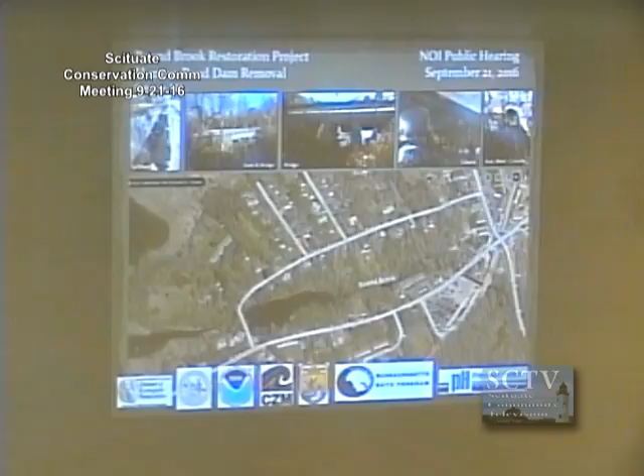So those two components factor in heavily with the rest of this design. Looking into the spillway or the dam itself, it's actually accreted a lot of sediment into it, and that has become vegetated, primarily during the growing season.

Did that work, Cal? That point—oh, shoot, it was battery dead. Okay, bummer. Yeah, do you want me to point if there's something that's not working?

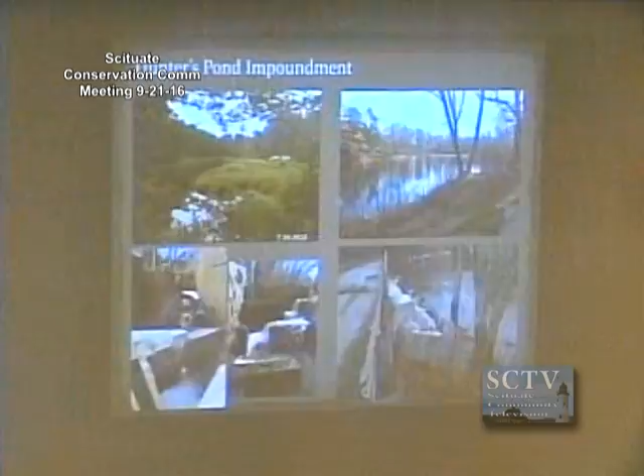So just to orient yourself, flow goes in this direction. This is the spillway, that's the mill building, this is where the culvert is. And likewise, spillway here, culvert here.

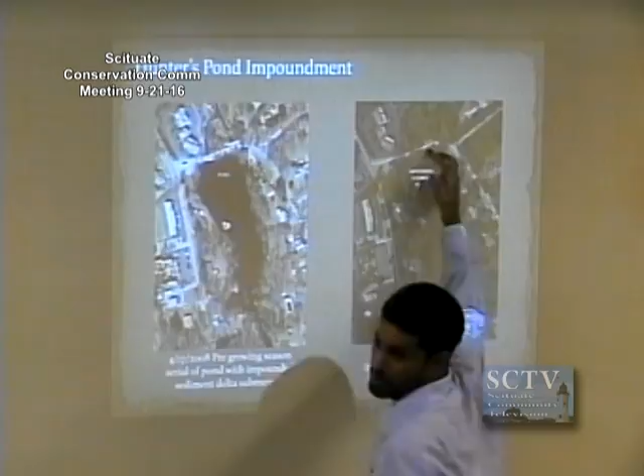We did more sediment sampling to develop a more detailed sediment sampling plan, more historic resources documentation, more detailed engineering design associated with bridge scour, fish passage conditions, the culvert repair work, and there's a water line also that crosses the impoundment.

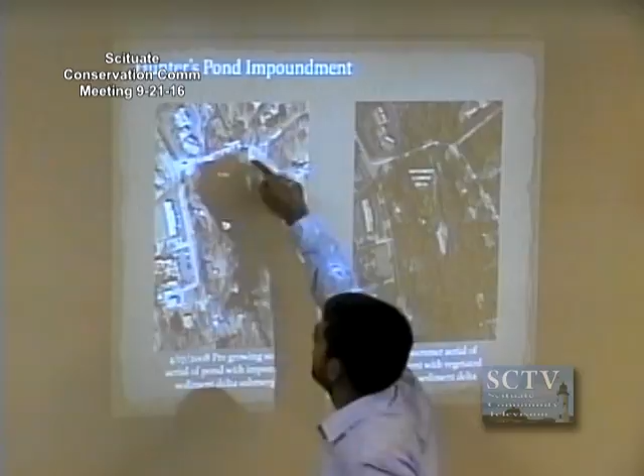Let me point out where that is. It's not visible, it's underwater - it's an old water line that crosses right through here. It's old enough that the town is interested in repairing it. In fact, they were considering repairing it before this project got to this point, but now we're going to do it all in one fell swoop.

It can't be eliminated entirely - it has to be replaced, and its depth is unknown, and it could become a conflict if after removal it becomes exposed. So there's multiple reasons to remove it: it's old and needs to be replaced, but it's also potentially in a position that could interfere with the channel. So we're proposing to install it at a much safer depth.

So for water line relocation, we're now in the NOI process of the regulatory system, and Army Corps and dam safety permits are yet to come. Those are our next steps in this process.

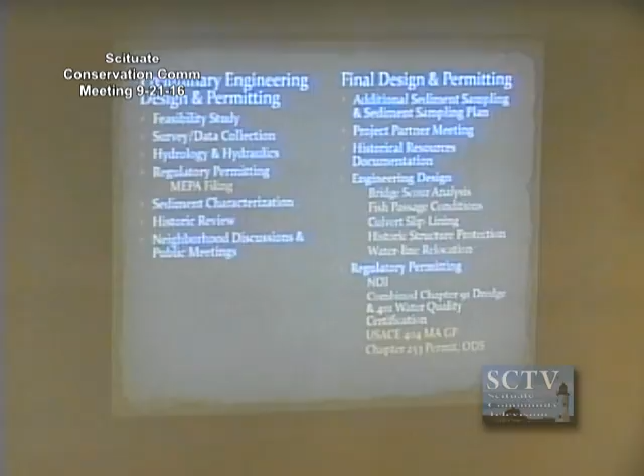Getting back to some of the design elements, we've discussed with the Natural Heritage Program - there's a native plant upstream that's of interest to them. We've been communicating with them during the pre-NOI process to inform them in more detail about the hydraulic impacts. They've since ruled that there will be no adverse impacts anticipated to this native plant.

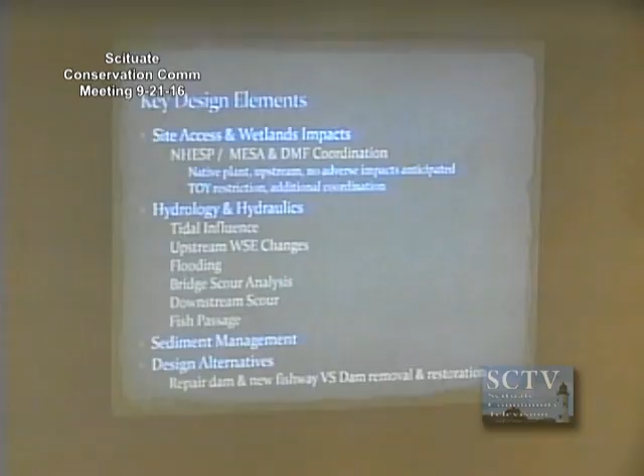We're also coordinating with the Division of Marine Fisheries about a time of year restriction during construction and some additional coordination after that. Both of those agencies we've been in regular communication with, and DER is in ongoing discussions with DMF. Next I'm going to hit on a few of these in more detail - the hydrology and hydraulics items, sediment management, and some of the design alternatives we looked at.

Natural Heritage said there was no endangered species or anything of concern, right? Right, so they mapped - their habitat exists upstream of the railroad bridge.

They wanted to know more information about how we were going to be influencing water surface elevations because it's a wetland plant. Once we established through hydraulic modeling that there's really not going to be too much of a change up there, they were comfortable with this and basically ruled that there would be no adverse impact anticipated.

If I could add - Natural Heritage was clear up front that they wanted to see some really solid analysis on that, and as part of the NOI package, we provided that to them, which they provided a letter, included in the package to you. So they ruled that there was no additional MESA review required on that as well.

Some of the basics of the engineering design, presented in the NOI package, is that we're talking about removing most of the spillway - not all of it, the full vertical extent - but to allow for the fish ladders to remain in place. The fish ladders are actually concrete, and one fish ladder is tied into a retaining wall that's right up against Mordecai Lincoln Road.

We want to leave that in place to not disturb the Mordecai Lincoln Road embankment, and likewise on the other side that also has some stability associated with the embankment. So we're proposing to cut that spillway right in the middle to allow for a natural channel to go right through the bridge, but to not remove the fishways on the side.

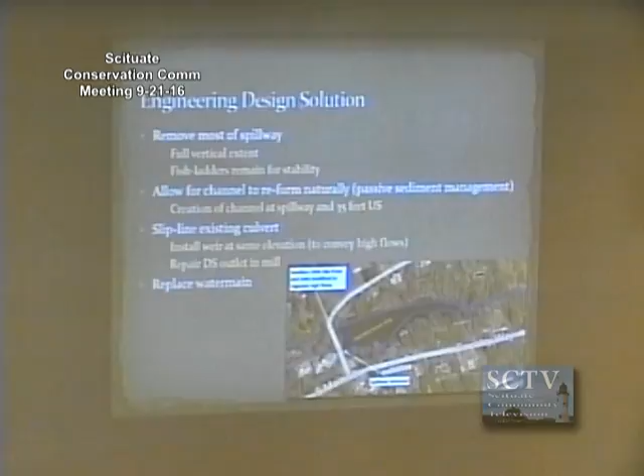Looking at the impacts to regulated areas, we're essentially talking about converting a pond into a channel and its adjacent floodplain. This would mean a net loss in land under water, a net gain in bordering vegetated wetland, and essentially no change in the 100-year floodplain. The same area that gets inundated now under existing conditions will be inundated under proposed conditions. And then there are nominal changes to inland bank.

Basically, inland bank right now is mapped around the perimeter of the pond. This will be a shorter length of a single channel going through the impoundment, so it involves a lateral shift, but not much of a shift in length. And riverfront area will now apply, whereas it technically does not apply right now because this is a pond.

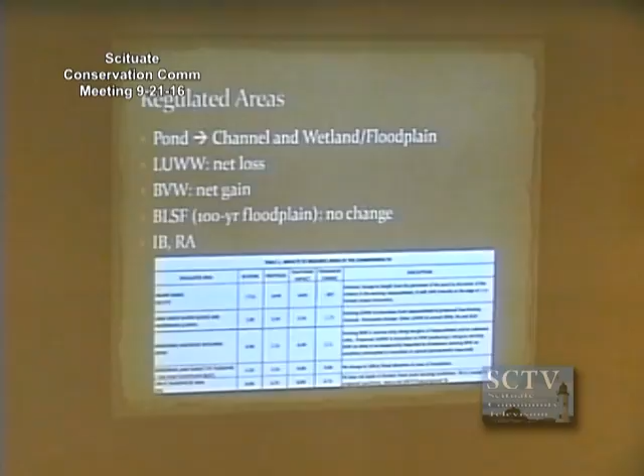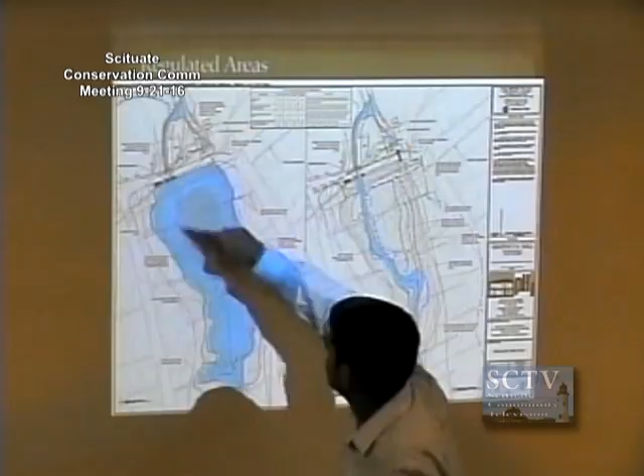So there'll now be a riverfront area along this channel. Looking at one of our plan set sheets, this is the regulated areas plan. On the left-hand side is the impoundment. There's the delta that's been mapped as bordering vegetated wetland, I'll point that out now. Essentially, this area is what is mapped as bordering vegetated wetland — this is the sediment delta that has vegetation on it.

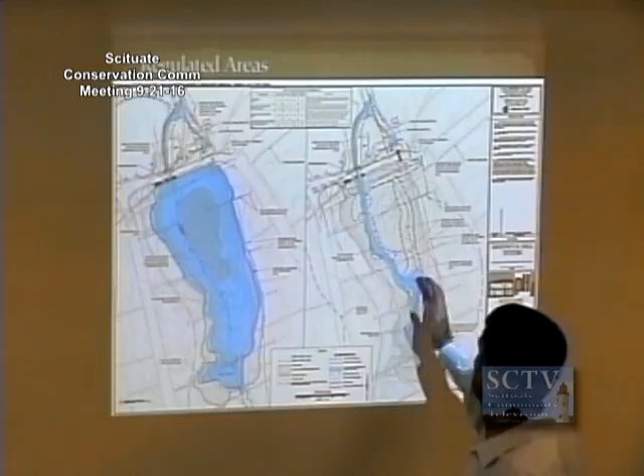Under proposed conditions, we'll see some sort of channel. Its actual pathway is a little uncertain at this point because the sediments are so soft — there are multiple ways you could cut through. We've proposed one potential alternative for that. All of this area will essentially revert to or convert to some other kind of bordering vegetated wetland.

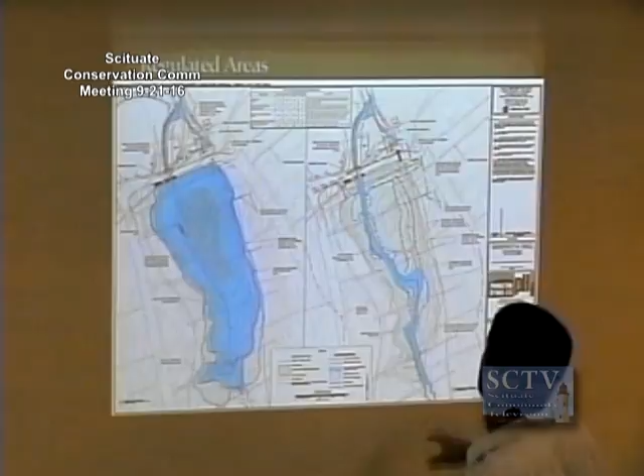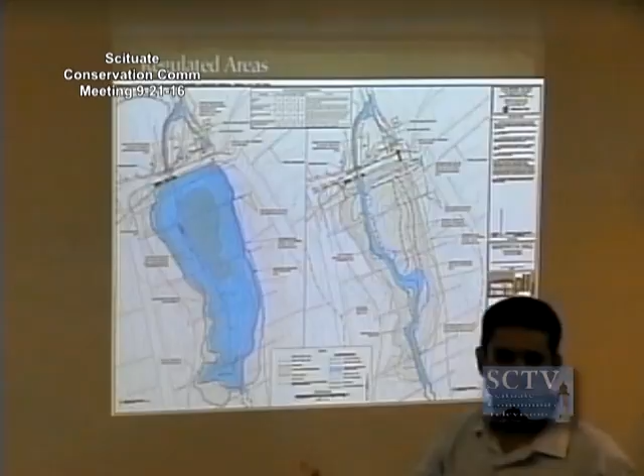And then the other interesting aspect about the tidal influence you were asking about is that this red line essentially corresponds to what will be inundated under the highest predicted tides. My next slide gets into that in more detail. Thank you.

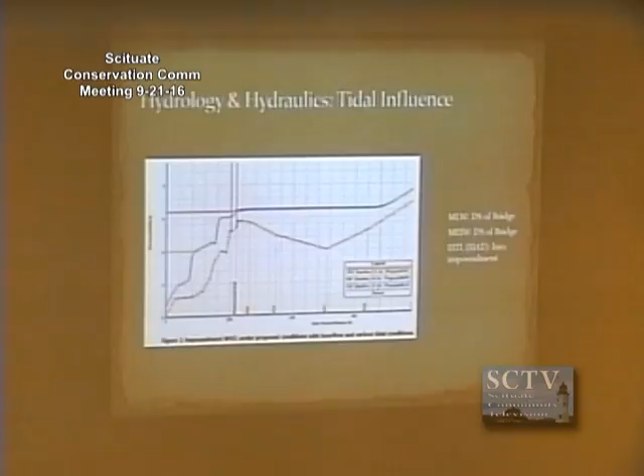This is what's called a longitudinal profile taken out of the hydraulic model. Flow is essentially going this way. This represents the impoundment, this is downstream of the impoundment, and this line represents Mordecai Lincoln Road. This is with no dam in place, comparing the tidal conditions from existing to proposed conditions.

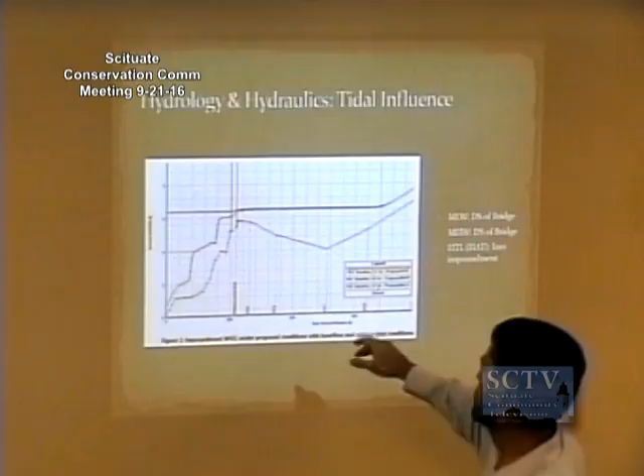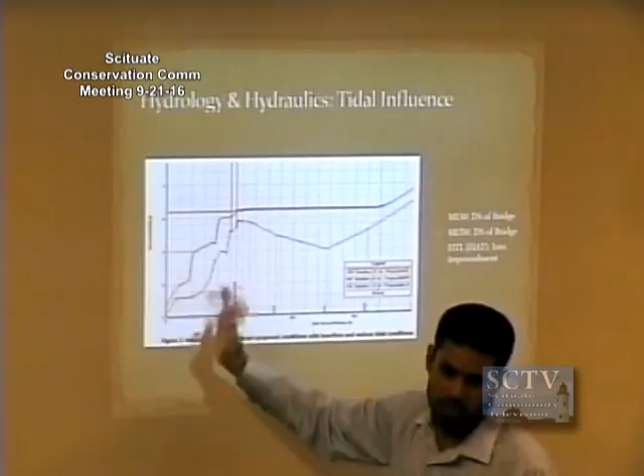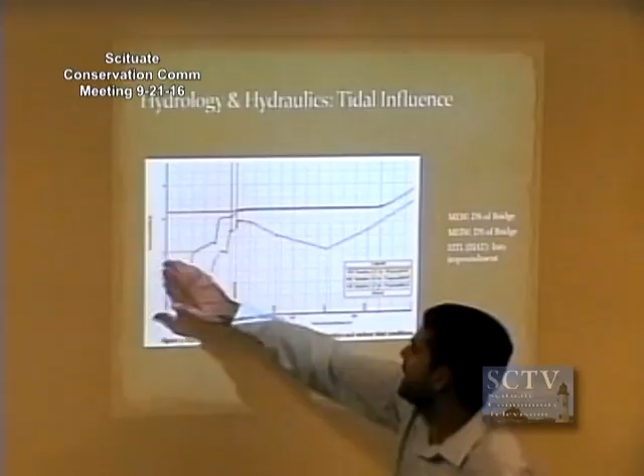This would be low tide, using a base flow — the minimum flow coming down the Bound Brook. This is what low tide looks like, way out, beyond the hydraulic model. This is called the mean high water, the middle high tide. As you know, every day there's a higher high and a lower high. This is the in-between, and that interface is the channel still downstream of Mordecai Lincoln Road.

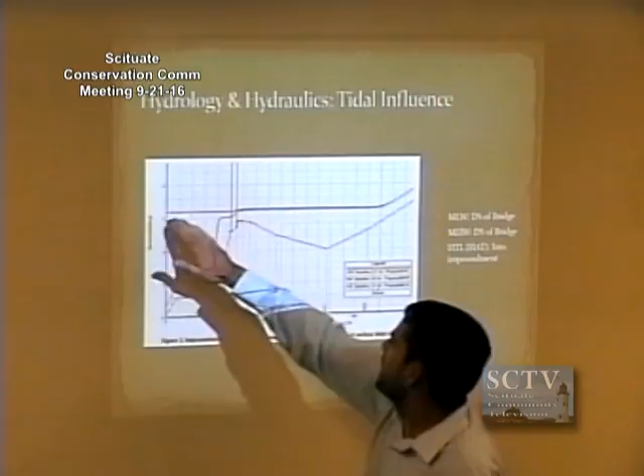However, the red line represents the highest astronomical tide — that's the spring tide, or highest predicted tide, and that will now have access into the impoundment, whereas before it only hit the dam.

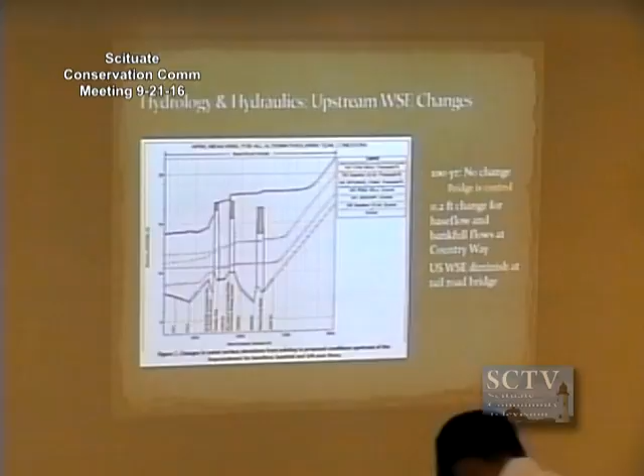So looking again at upstream water surface elevation changes, this became of interest to the Natural Heritage Program. This is Country Way, this is the railroad bridge, and this is Henry Turner Bailey Bridge.

The key point to note here is that we're comparing existing and proposed flood elevations under the 100-year flood. There's almost no change from existing to proposed conditions. We're actually utilizing the culvert under the mill building to convey some of that flow. If we were to block that culvert off, that would make the 100-year flood higher than it is now.

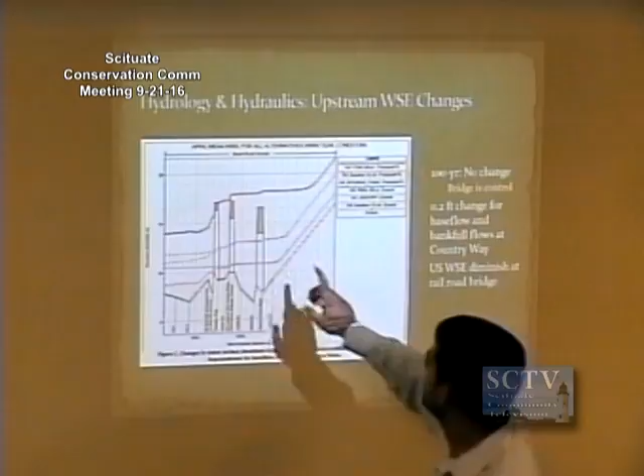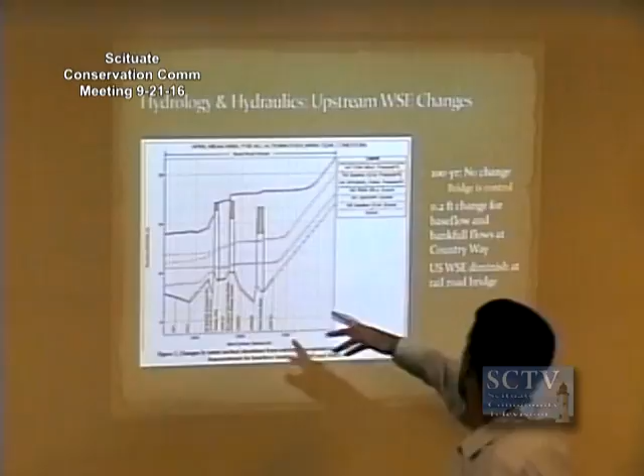So we actually need that culvert there. Under lower flows, the base flow, the lowest flow, and the bankfull flow, which is somewhere between the 1 and 2 year recurrence interval flow, we're talking about water surface elevation changes on the order of 0.2 foot at the upstream end of the impoundment, around these bridges. So the area of that sensitive species would have very little change in water surface elevation.

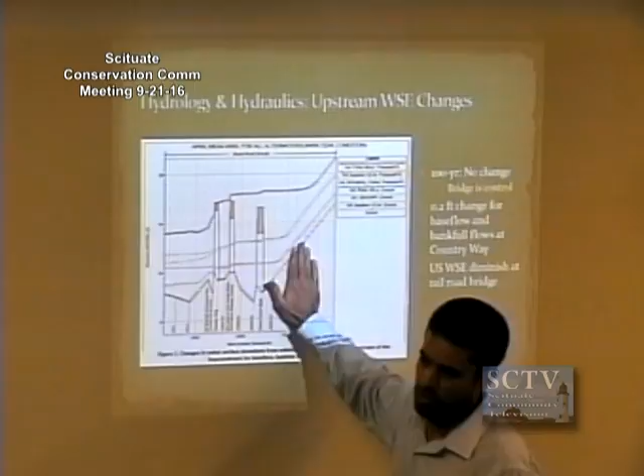So again, looking at this, I've already talked about it, but this is showing the 100-year water surface elevation during the 100-year flood at the dam. This is the dam, this is the bridge.

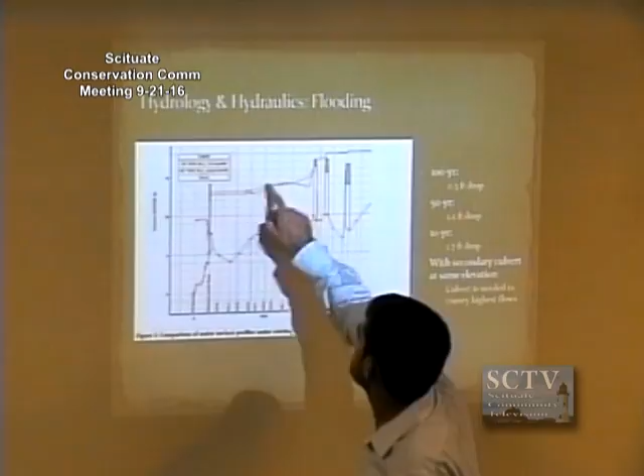Blue is existing conditions, red is proposed conditions. It's a slight drop of about 0.3 foot. This is very small, probably not going to be noticeable just by observation.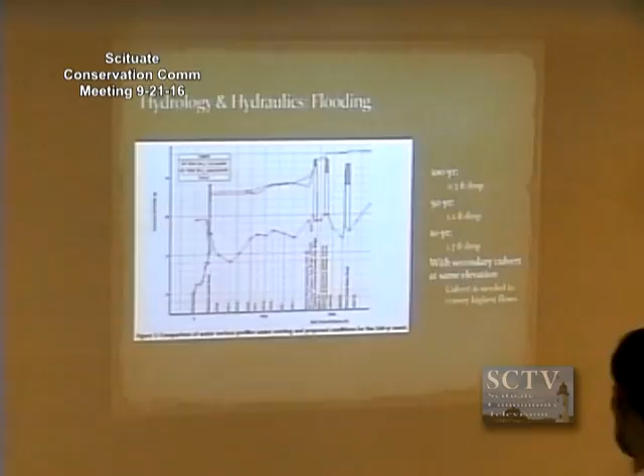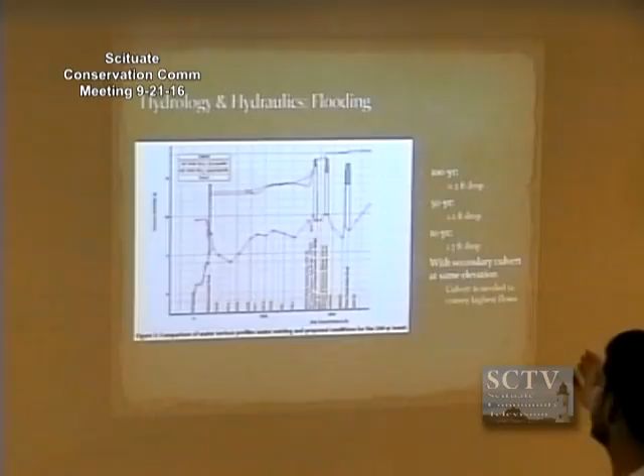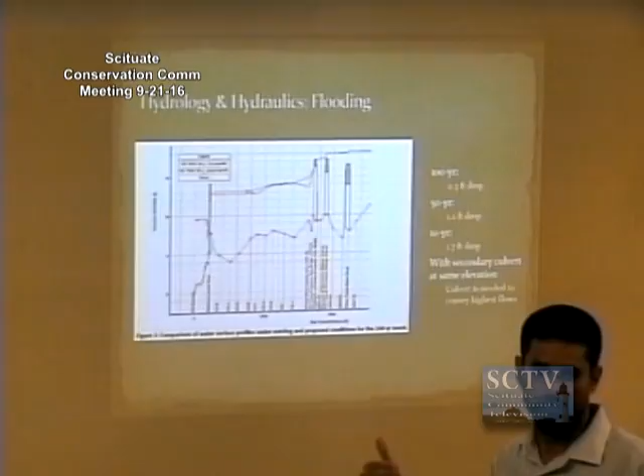But we predict a larger drop under the 50-year event of just over a foot, and then just over 1.5 feet under the 10-year flood. So again, for the 100-year event, it was actually essential to allow flow to go through that culvert in order to keep those flows at or below existing conditions. If we were to block that off, it would increase the risk of overtopping during flood events.

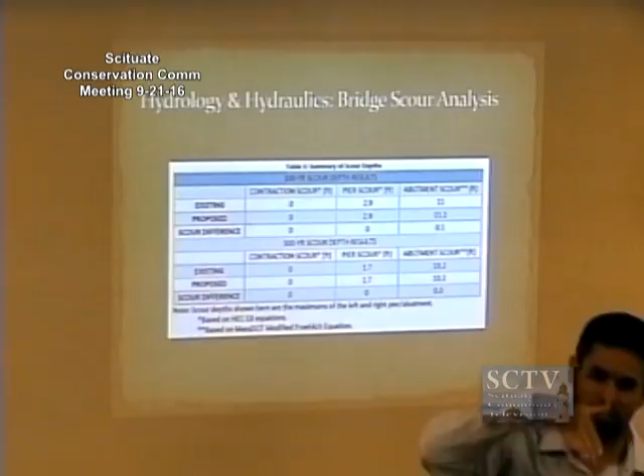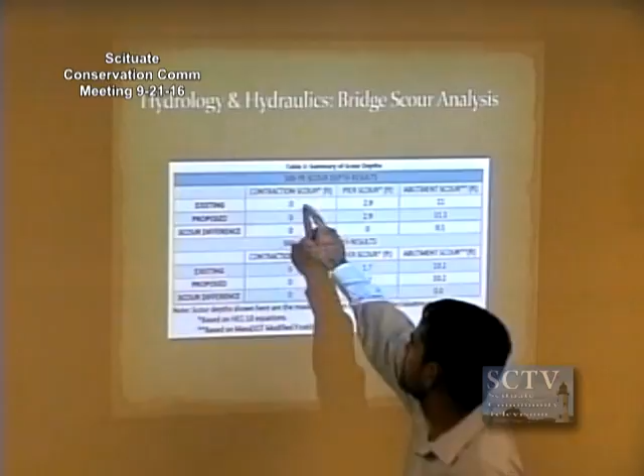We also looked at scour at the bridge. The key points to notice here: we did a typical scour analysis following MassDOT regulations, looking at 3 types of scour. Contraction scour is created by flow that goes through a constriction and is accelerated — constricted on the sides, but even under flood events it's also constricted vertically, which is called orifice flow, under higher velocity. The point being that under existing and proposed conditions, there's no real change anticipated in scour.

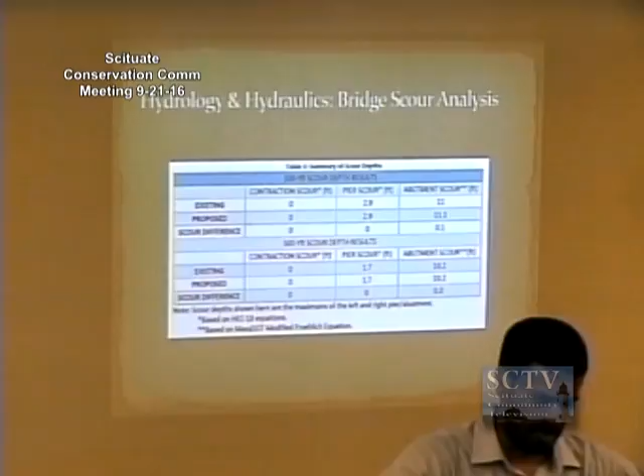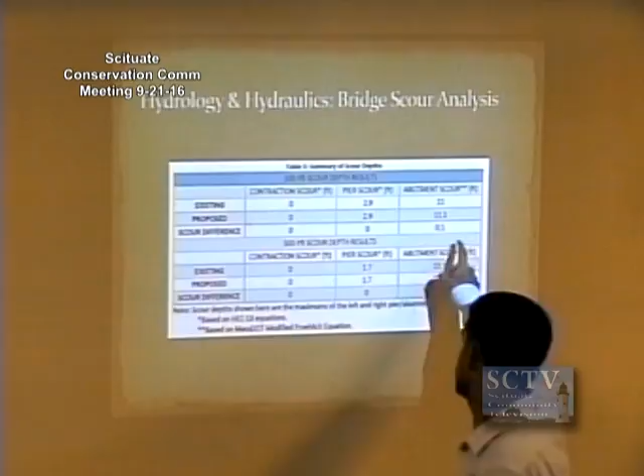We also looked at pier and abutment scour. There are 2 piers in the small bridge, and abutments on either side, so we looked at the vortices that form right around those structures. Again, there's no substantial change anticipated for any of those — a minor difference in abutment scour between existing and proposed. Basically, we're not expecting any changes in scour of the bridge structure.

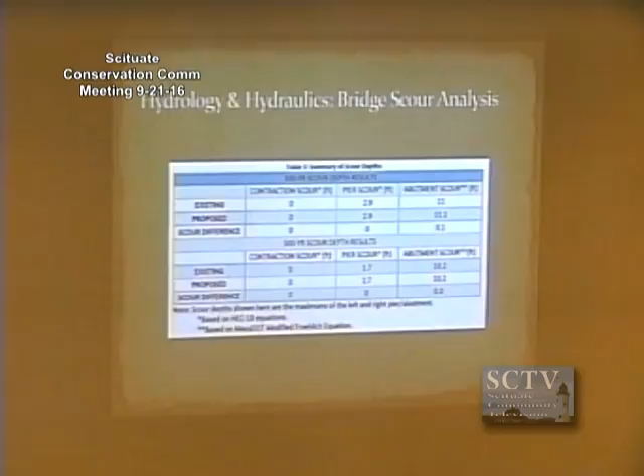Is a vortice like an eddy type of thing? Well, an eddy is kind of a slow velocity zone — this is actually something faster. If you stood in flowing water, you'd feel that flow rip around you, that's the vortice that forms right there. I guess technically it is connected to the eddy behind your legs if the flow is right there, so that scour happens where you're interrupting flow or creating an obstruction.

Okay, this gets to the sediment investigation. Ultimately, after the 2 phases, we took 8 sediment samples throughout — 2 in the upstream areas, 3 in the body of the impoundment, and 3 downstream.

We also probed the impoundment and had it surveyed. We figured the total volume was about 3,000 cubic yards, but with the formation of a single channel and the low gradients here, we really only expect about 450 cubic yards to be mobile after the dam is removed.

We also ran the typical gamut of contaminants that you test for — EPHs, PAHs, PCBs, metals, VOCs — so volatiles, petroleum hydrocarbons, polycyclic aromatic hydrocarbons, PCBs.

We then compare them to human health standards, MCP soil and groundwater standards, as well as the freshwater and marine sediment probable effect concentration. Above that, you would likely have some sort of impact on ecological standards. Below that, you wouldn't.

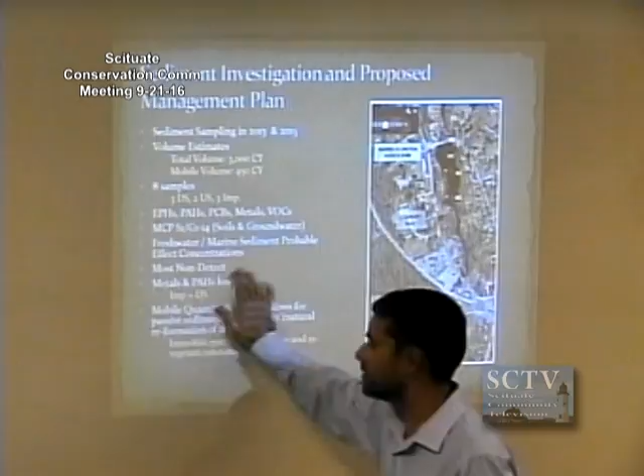Most of these were non-detect, not detected. Metals and PAHs popped up in some of these samples and some of the downstream samples, but they were basically in the same ballpark. So we don't perceive that being a problem, relative from impoundment to downstream, if that's essentially the background condition in this watershed.

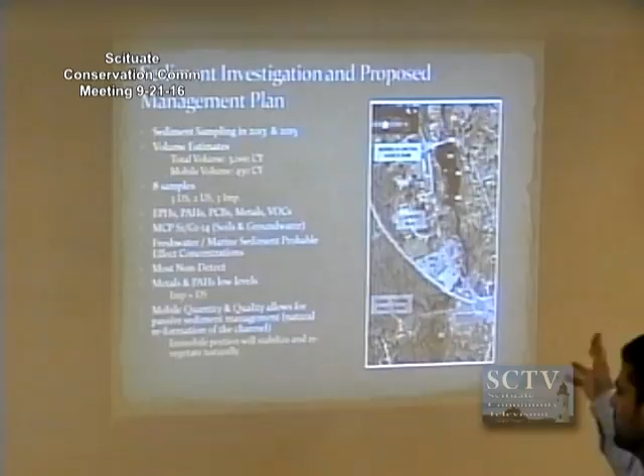That provided us justification to recommend basically a natural reformation of the channel rather than excavation and hauling off site. That would not only be unnecessary based on these contaminant levels, it's an extremely costly and high impact activity. So it's something we were glad to not have to recommend at this point.

The vast majority of the sediments, especially the ones that are vegetated, are likely to just sit in place and dewater, and then the vegetation will transition to something a little bit drier, a little bit less wet, but it'll likely stay in still a BVW, bordering vegetated wetland category.

Is the revegetation just naturally occurring, or is there planting that's going to be going on after? That's a good question. Right now, we're proposing to allow it to occur naturally.

With a lot of our projects that we've done at DER and others, we see there's such a large native seed bank within those impounded sediments that we generally see those impoundments vegetate within 1 to 2 growing seasons. Paul has some photos later that show what a typical example might look like. I'll jump to that right now.

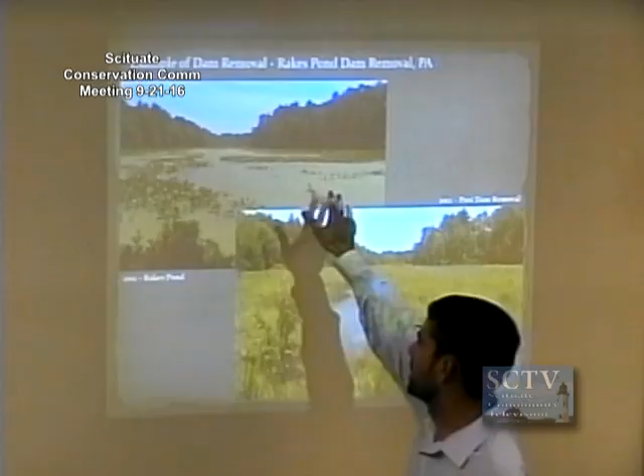This is a project we did in northeastern Pennsylvania. I pulled it out because it has this sort of similar condition. When the dam was intact, it had a lot of spatterdock and emergent vegetation, emergent floating vegetation, and a lot of duckweed. When we removed it, within one full growing season, that's essentially what it looked like.

Nature abhors a vacuum. It fills fast with a lot of annual plants initially, and then more long, perennial plants will eventually creep in. So it's actually a fast process. We've seen sites green up at the tail end of a growing season. When a dam was removed in October, it was actually green by Christmas.

And granted, that's a thin ground cover, but it happens pretty rapidly on its own. There's a native seed bank in the sediments as it is, so a lot of seeds are just sitting there waiting for the right conditions, and once they occur, they take advantage of it. That means a lot of seeds sitting there would, in other situations, never actually bloom because they're not in the right spot to germinate.

Do you ever see more invasives in something like that? Yeah, we do. We take that into account. It's something we did not think was a huge problem here because there's not a lot of invasives in the perimeter. But in areas where there's already a good established population, like say a phrag population, that's where we recommend sometimes going in and treating it before you do the removal. It just depends on the situation. If there's a lot established there already, we'd have reason to believe it's going to expand. In this case, it's not a huge problem at this location, so we're not recommending it at this time.

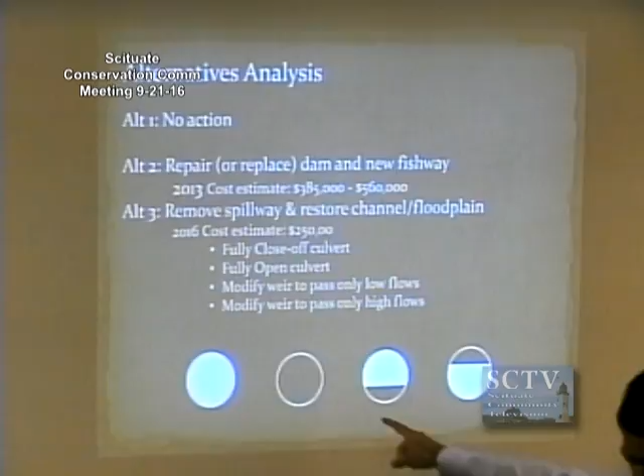Leaving that culvert fully open - maybe I didn't explain this well enough - it has a weir in front of it, so it's partially blocked. Capacity through that culvert is really dictated by the weir in front of it, not the actual size of the culvert itself. So we had proposed or looked into the alternative of removing that weir altogether and opening it up to all flow.

That was not desirable because it essentially would create a false attraction to fish moving upstream. As it is now, there are sort of two channels. One channel is coming out of the mill race and out of the mill building, and the other is coming out of the spillway.

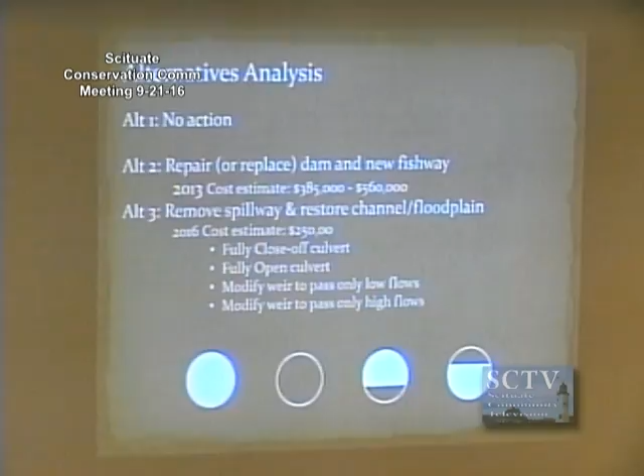They converge at that point. If there was still flow coming out of the mill race, fish would have to flip a coin and decide which one to take. And if they took the one into the mill building, they'd run into a head wall and not get anywhere, which would really impede the passage performance and interfere with one of the big goals here, which is to restore fish passage.

So that was one reason against these two options. And this option, leaving it totally open, actually increased flows, increased velocities, and set up the foundation of that building to be subject to more flows than it has now. We didn't want to do that because that's putting the historic structure at risk. So those two were excluded, and this is essentially a status quo situation.

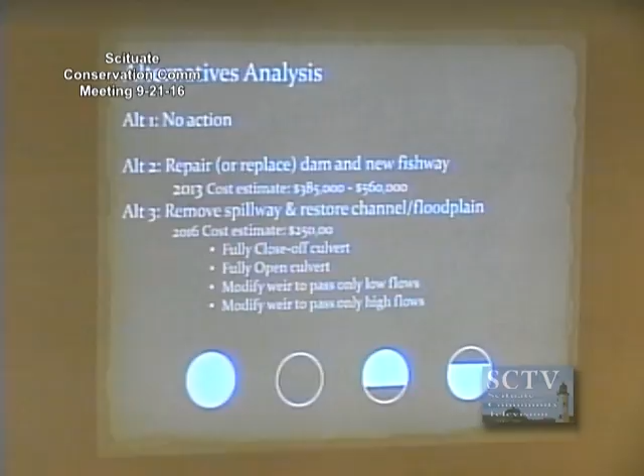It turned out that the elevation of that weir as it is now is just about right to keep the 100-year flood elevation at or below what it is now. So we're proposing to slip line the culvert and then reinstall a weir at the same elevation as it is now. That whole process and design is being coordinated with Mass Historical Commission as well - the slip lining process and then the repairs to the head walls and the wing walls.

Our plans do have some details that are pretty detailed in terms of the amount of work that can be done at the outlet of that pipe, because that outlet's right into basically the cellar or basement of that building. If you're looking at it, you can see many iterations of repair work done around it - the original dry laid masonry, then some more wet laid, brick work, concrete block, and then concrete pour and grouting.

So there's been a lot of generations of fixes on that, and we're basically trying to optimize this by repairing as much as we need, but not more than we need to, because we don't want to get into that original old mill building structure. So it's a bit of a balance between making something engineering and solid that'll last, and not going too far into the historic structure.

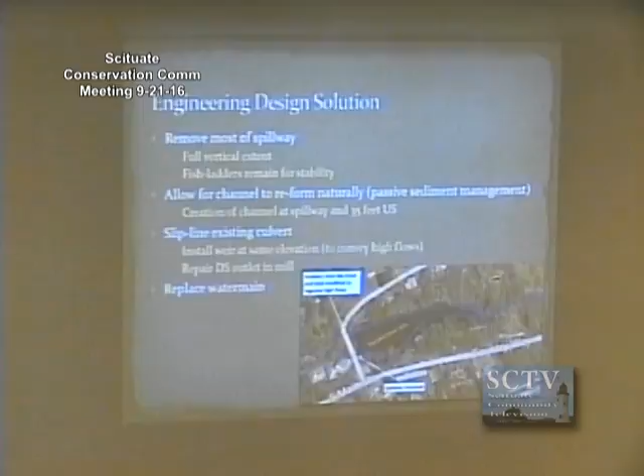The last point I'd like to add is that we know downstream, just below the dam, there's known habitat for rainbow smelt spawning. Being sensitive to that, part of why we're proposing this project now is that we want to set up for construction in July, so we'd avoid any potential impacts in early March on the spawning habitat.

Do you think that spawning habitat will remain, or will it be eliminated and they'll spawn upstream after that? I think in the short term it would certainly remain. The hope is that we'd have potential for additional habitat upstream in the impoundment. We're anticipating the habitat that opens up in the impoundment to be preferential to the habitat they're using right now.

Pat, did you have any other questions? No. So, audience, yes sir—just state your name and address, please. I'm Chuck Ladd. I live in Syracuse, but we have the estate at the Mordecai Lincoln property. Sure, I've met Jason, I think—you're Jason, right? Chris, I think we met you out at the site. I have essentially three practical questions.

The first has to do with the culvert at the weir—there's been degradation in the metal liner that's there now. I heartily agree that putting in a slip liner would stop that continued degradation and deterioration. But with that repair, would you be shoring up what had been lost in terms of the foundation that's been eroded? That's a very good question—we estimate quite a bit of material will have to be replaced below that culvert, in the form of grout, flowable fill, or concrete. I'm a little vague on the exact construction details, but contractors are aware they'll have a lot of material to put in there to shore up the base of that repaired culvert. I've sent in a letter supporting the project, and I think that answers the question—any solution is better than what's there now.

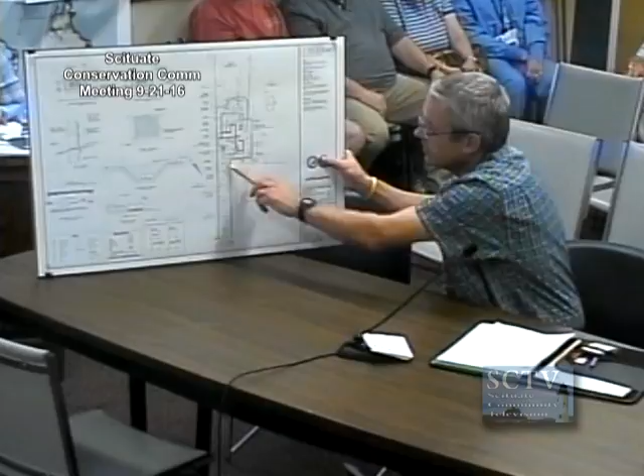As I said before, I resized both the infiltration basins, so everything except this proposed patio is going through the infiltration beds. Peter Palmieri came back with all his conditions satisfied in the letter. There was soil testing required at that point too, where the basins were going to be.

Yep, I did the soil testing actually the day of the last hearing. It's up in Elm Park. It's a vacant lot. You weren't here at the last meeting.

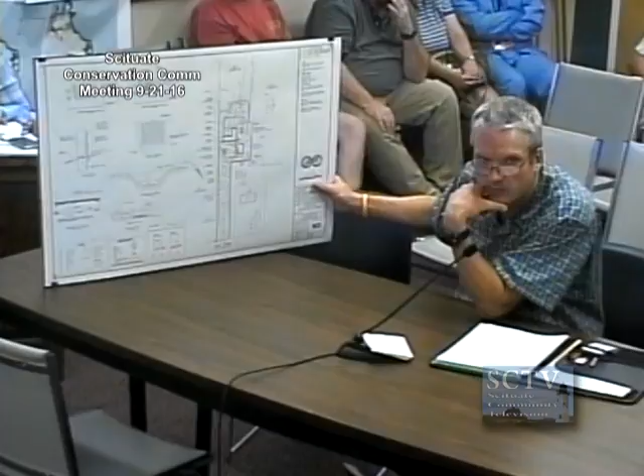Does anybody have any questions? I'm just going through this letter real quick. The only question I have, and I wasn't here at the last meeting, is about the soil testing. My understanding from the discussion was that the groundwater was very high, even during these drought conditions.

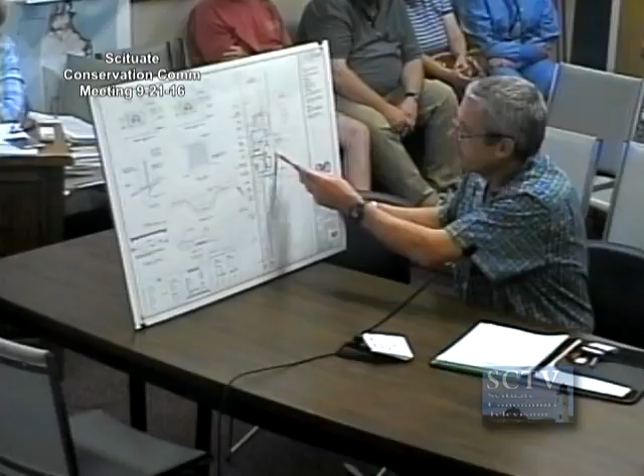And so the soil conditions underneath that infiltration area are different than... Nope, they're consistent with what's out there. Not very high. The soil out there is between 30 and 38 inches, which is typical for the area, and it varies from about 30 inches to as deep as 60 inches in some areas. So yes, poor soil conditions. I modeled it as the D soils, the worst soils there are, but I did have to adjust the fields, made them a little bit bigger and narrower, so there is enough separation between the bottom of the field and the groundwater.

Okay, thank you. I know where this is. Do we take comment on this?

Yeah, the stormwater piece—we told people last time if they wanted to read any of the reports, because this is not part of our NOI, this is the stormwater permit piece that goes with that. So if you have any questions with regard to stormwater... Anybody? We have the report on record if anybody wants to look at it.

Okay, great. So we want to take a vote to approve. Vote on the stormwater permit, and then we've also included as part of the order of conditions that all components of the stormwater permit have to be met. All right, so I'll take a motion on the stormwater aspect of number 7 Elm Park.

I make a motion that we accept the stormwater report as written for 7 Elm Park, and the plan. Second. All in favor? Aye. Great. Carol's put together the order with the new plan date on there. Thank you very much, thanks for the work on that.

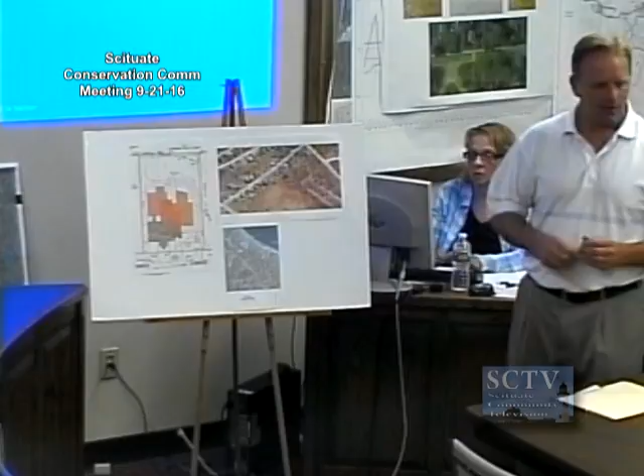Good evening, members of the commission. Brad Holmes with Environmental Consulting and Restoration, here with a notice of intent for 15 10th Ave on behalf of Schindler Revocable Trust. Along with me are the applicants Jerry and Maureen Schindler and family, as well as Sean Hardy, professional engineer from Hardy Engineering. What we've submitted is a notice of intent application for a single-family home reconstruction.

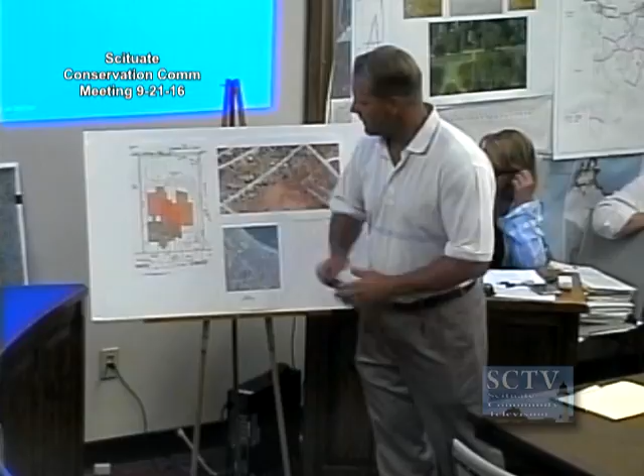I'll go over the lot and then get into some of the details. The site is at 15 10th Avenue, off Hatherly Road, with smaller lots - it's a 9,000 square foot lot on the north side of 10th Avenue. There's a bordering vegetated wetland system in the back that's fairly extensive, extending off-site as part of this region.

Brad, just orientate me, please - from Hatherly, how far down? Well, here's Hatherly Road. So you're down by the water end? Oh no, you're above the dip. Yes, probably about 1, 2, 3, 4, 5 - about 6 houses down, on the left-hand side. Gotcha - that they're building into? Yeah, so this wetland system here that comes just into the corner of their lot is this wetland off-site here.

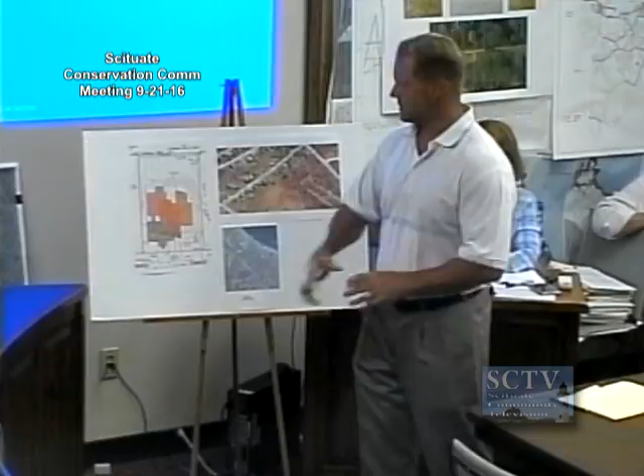Bordering vegetated wetland with the associated 50 and 100 foot buffer zones. The site is also within land subject to coastal storm flowage, being the FEMA flood zone at an elevation of 16 feet. The existing home is shaded here in brown. What I've done is taken the site plan that Mr. Hardy's prepared and just blew it up and given it a little color - it's the same image you have in your hand. The existing house is shaded here in brown, within the buffer zone and within the floodplain.

What we're looking to do is reconstruct that house in this orange footprint. You see the proposed house with stairs and decks off the back. The reason for moving the house back is so that it complies with the zoning requirements. It's all within existing lawn - the area is fully developed, with lawn right to the back, and a chain link fence surrounding the property.

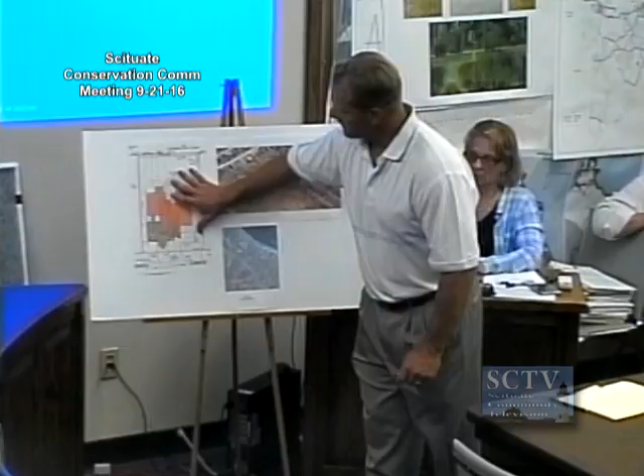Associated with the reconstruction of the house, we'll be raising the house up so that it's above the FEMA elevation of 16 feet. In order to do that, the proposal is to bring in fill and grade around the house as shown here in the proposed contours, with a foundation that will be constructed as a crawl space foundation - a conventional foundation to house the house.

Mike Solomando is also here, the builder for the project. He's had a chance to speak with the building inspector today and go over the details of building in the flood zone - we can get into it further if needed - but the building inspector was supportive of this and in agreement with that methodology.

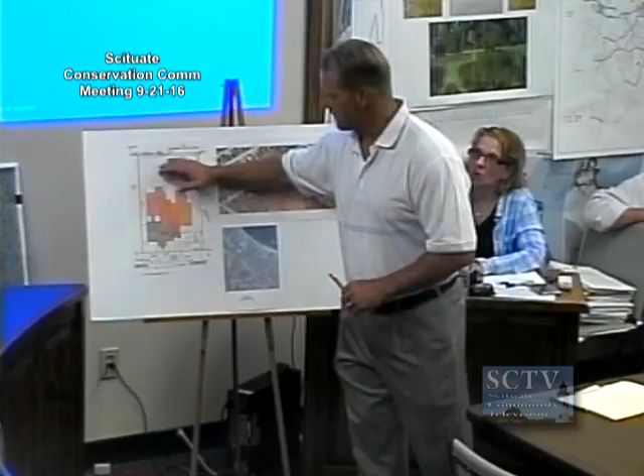So to go over it again, what we're looking to do is reconstruct a single-family home here. It is existing within the buffer zone and within the coastal flood zone. Again, the entire site is developed at the back, as you'll see, it's a maintained lawn right to the edge. There is work partially within the 50 and within the 100-foot buffer to the BVW and within the floodplain. I'll certainly take any questions you might have.

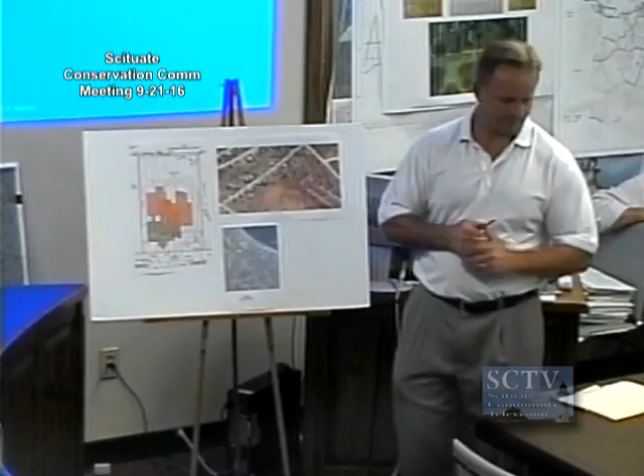Bill? Can we skip me and come back? I need to absorb this. Please, and thank you. Richard?

I may need to come back as well, but just making sure I understand - the house that is there now is going to be razed? Correct, removed. That's the brown, right? Yeah, okay. And a little bit of the house extends into the 50-foot buffer. Is there no way that can be avoided?

The reason for moving the house back from where it is now is to comply with the zoning setbacks. The house is located in this region. I'll let Sean provide a little more detail on that.

It's an undersized lot, 9,000 square feet, as said, and it requires 10,000. In speaking with the building inspector, he said in order to comply with zoning, even though the existing house is way up on the road, he wanted it back to comply with the front setback. So the bump outs in the back of the house are decks on sonotubes, but that little piece is there to comply with zoning.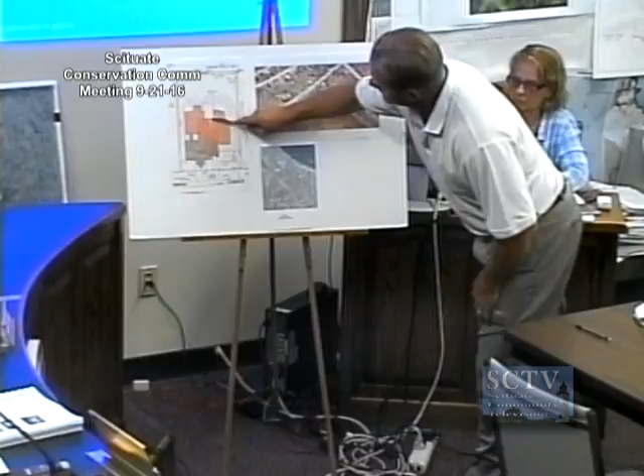In the front, the current house front is within the 100-foot buffer zone. So you're going from invasion of the 100 to some invasion of the 50. The existing house footprint comes around like this. And that front little L shape is a walkway, not part of the house footprint. The orange L on the front is a walkway to get down.

What kind of foundation was under the brown house? It's a concrete block. Did I understand that the new foundation is going to be a standard closed foundation? Yes, it's a standard concrete foundation.

It's land subject to coastal storm flowage, so in order to try and meet FEMA and have this not be within the flood zone, and avoid paying flood insurance, the lowest adjacent grade is proposed to be above. We did it for the 16 because we know the maps are about to be approved and changed. I also know the town's very involved with the CRS program, and you're one of the beneficiaries of the hard work you do for the 15% reduction. But this is another way of getting a house on a lot that's been in the family for a long time, and hopefully they're not going to have to pay flood insurance.

That's why we went to the building inspector today, to make sure. I've done this in a few other towns, but wanted to make sure he was okay with it too, being the person who approves it. It's a standard concrete foundation with a crawl space under it, not a basement. But the fact that the ground outside is above that flood elevation means the house would be out of the flood zone. So you don't have to have the blowout panels.

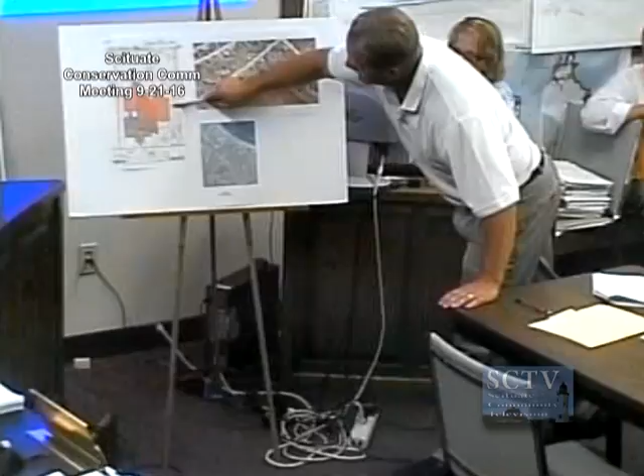If that's something that... Could you show on this map where the fill's going? Sure, it's this area here, the red lines, it's the elevations on the red. These are the proposed contours so that the filling would start in that region and come up.

And because it's not a protected area, you could do that. It is a protected area in the sense that we're in the buffer zone. And we're in land subject to coastal storm flowage. Yeah, land subject to coastal storm flow, there's 2 types of land subject to flooding.

We have the bordering land subject to flooding associated with an inland waterway, where Sean described that if we were to do that, that is acceptable as long as we compensate. But because it's land subject to coastal storm flowage, we don't have that performance standard, so it's not required. So it does meet, there are no performance standards for land subject to coastal storm flowage.

It's a definition in the regulations. Because the ocean has unlimited volume, putting some fill around the house is not gonna affect it. I understand that, but they're still bringing in fill into the 50.

Right, oh yeah, well that's a different question though. Yeah, it's a 2-part question. What volume of fill are you talking about?

I didn't do a calculation on that volume. As Brad said, I mean, it is fill, but it's maintained lawn today, and it's proposed to be maintained lawn after the fact. It's just at a different grade.

Right, and if you look at the grade of the lot where the house is, it's probably 12 to 14, and they have to bring it up.

to 16. Is there any other way to stabilize the fill that you're bringing in other than grass? I mean, at least within the 50. I don't know if anybody wants any native species or anything like that in that area to stabilize it rather than grass.

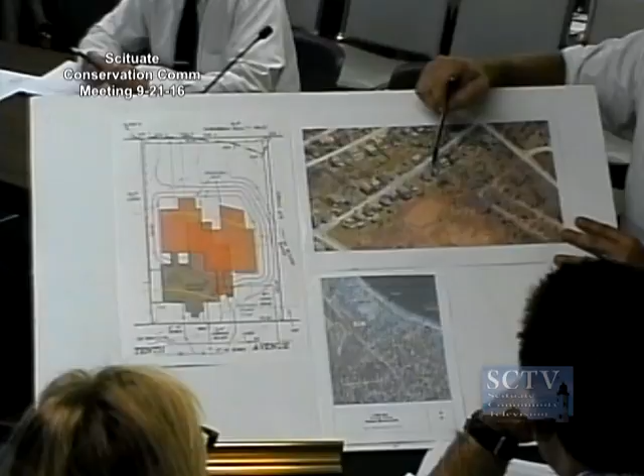Can you show me which one that is again? Thank you, I appreciate it. This is the house here, this proposed home between the neighbors. Oh okay. There's a little bit of open space on this end, and there's this house. So where the fill is going to come down, that looks like it's coming to the property line - is this on this end? Yes, I believe so. What's the distance from that side of the house to the property line?

This says 7. The existing house now is 7 feet. And that's where the property is. I have to get a scale out for all of this, the distance. I don't know, we have to do that.

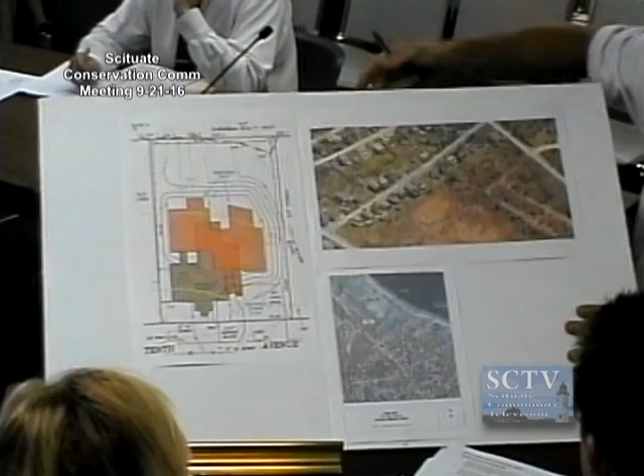Can I see that? Sure, minimum of 8 anyway, 8 to 10 probably. I believe it's 8 on the left and 10 on the right, from memory. But that's from my memory.

And the square footage of the new house, is this the same footprint as the old one? I don't think so, it's not the same footprint. I don't even think that's a zoning issue, I don't think you have to go before zoning. I think it's a simple matter of getting the information on the houses on either side.

Yeah, I'll have to read it and do that average. Like I said, we went to the building inspector, figured he was the zoning enforcement, and that's what he told us. Well, it's a new position and some things have moved around there.

Look at it, certainly, if you could do that would be more than happy to. It would be the thing that, we try to keep everything out of the 50. We certainly appreciate what they're trying to do. I think the foundation stuff can all be compliant. Working with the full lawn there, that could easily be worked out, maybe if any planting's required, or if it's just revegetated and stabilized, that whole piece could work.

Certainly look at it, definitely. But if some fill is required or grading to be within the 50, as Brad mentioned, he can do some planting to mitigate that. But I would take a look at that right side as that impacts the abutter on the right. Certainly.